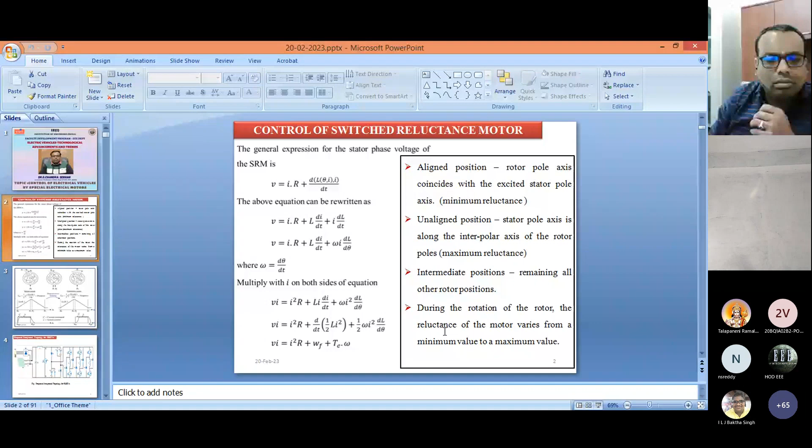Sir, hello, sir. 1 minute, sir. 1 minute. Is it okay, sir, now? Hello? Yes, sir. Now okay, sir. Continue. Okay, it is now control of switched reluctance motor. Thank you, sir. Okay. So, sorry for the interruption, and now coming to my presentation. Thank you.

Then why do we need to go for the switched reluctance motor? As you know, configurations like 6x4, 8x6 or 4x2 are the conventional configurations of rotor as well as stator. I am working on 6x4 or 8x6. Maybe I will clarify why we need to go with 8x6, 6x4 or 4x2, because once we teach that, if any student asks, sir, why do we need to go for only 8x6? Why not 6x4? Or why not 4x2?

If you take the 4x2, it means 4 stator poles and 2 rotor teeth. In a switched reluctance motor, we don't have any winding on the rotor; only the stator has windings, and we switch the excitation of one winding, after that another winding. As the rotor has no winding, it can be suitable to run up to about 10,000 rpm. This is one of the advantages of the switched reluctance motor. The torque by weight ratio is also more, and the volume is also less compared to conventional motors.

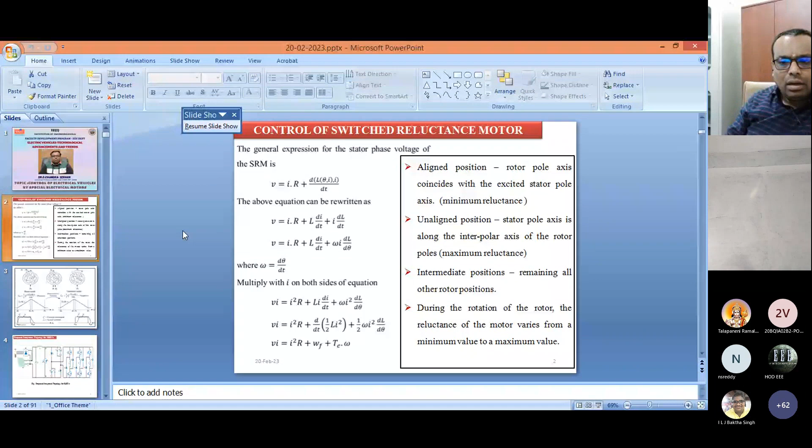Excuse me, sir. Chandrasekhar? Yes, sir. Sir, please change your slide, sir. Only the first slide, control of switched reluctance motor slide, is visible, sir. So now I already changed it, sir. Okay, sir. Thank you, sir. Is it coming now? Yes, sir. Sorry for the interruption, sir. Is it now visible or not? Please let me know. It is visible, sir. So what is visible? Tell me. This is the circuit.

Proposed integrated topology for PHEVs. Plug-in hybrid electric vehicles. Yes, plug-in hybrid. Now, if it is visible, I move to the next slide.

Hello? Okay, sir. Power flow chart in 2 modes. No, sir. Only the previous one, sir. Proposed integrated topology for PHEV. Now? Another screen, sir. Power flow chart, sir. Don't know why. Now the screen is moving, sir. Slides are moving. Excuse me, sir. Make it in slide mode, sir, so that it will be visible. When I make it slide mode, it is not moving. Slides are not moving. Okay. Is it visible now?

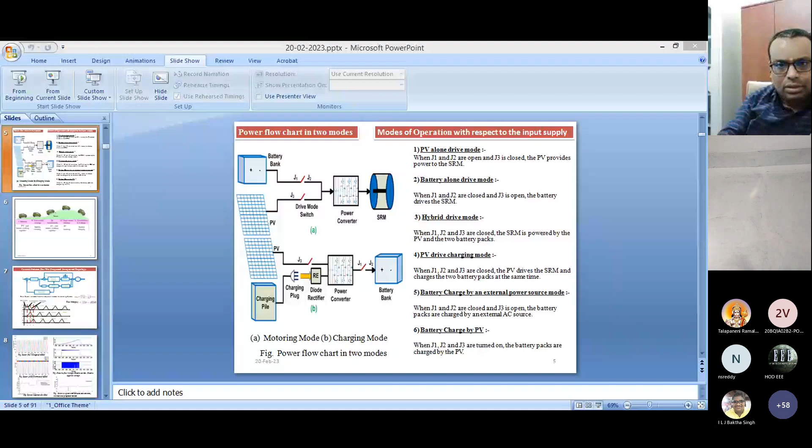Yes. What I propose here in this particular diagram is this proposed integrated topology for the plug-in hybrid electric vehicle. So this is the asymmetrical converter topology, and this is the front-end converter I have developed here. In this front-end converter, there are three relays.

The first relay is J1, the second relay is J2, and these J1 and J2 are the batteries, battery 1 and battery 2, and J3 is the PV panel here. Okay, and if you come to this diagram, here J1, J2, J3. For your understanding purpose, I mentioned here J1, J2, J3.

In the PV alone driving mode, what I am doing is J1 and J2 are open, and only J3 is connected. It means J1 and J2 are open in the sense these batteries are not connected, only J3 is closed. So when J3 is closed, this PV is connected to the circuit now.

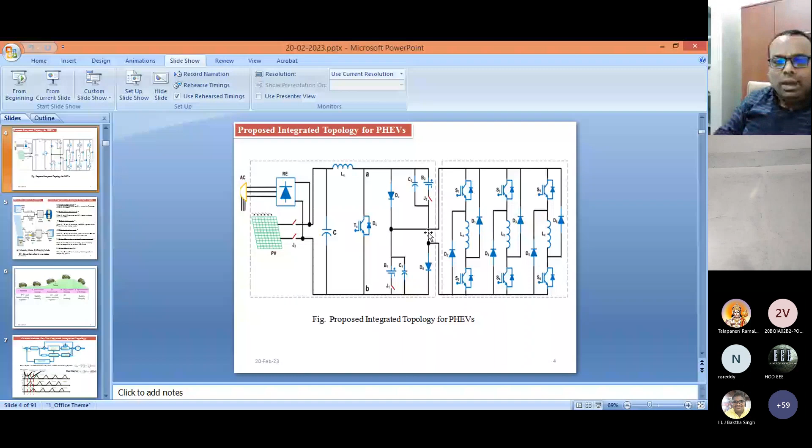Okay, I think my slides are visible now. Is it okay? Yes, sir. Hello? Visible, sir. Are you getting my slides? I think it is moving, right? Yes, sir. Visible, sir. Please, thank you.

Okay, so J1 and J2 are in open position, in the sense the batteries are not connected, and only the PV is connected to the converter, and then the drive is possible. That is PV alone driving mode. Battery alone driving mode in the sense J1 and J2 are connected, and the PV is not connected. Hybrid mode in the sense all three, the batteries as well as the PV, are connected. And PV driven charging mode.

So when J1, J2 are closed and PV drives the SRM motor. And also battery charging by external power source. So this external source is the charging point, when you have the charging plug and you need to charge it. So when J1, J2 are closed and J3 is open, the battery packs are charged through an external source.

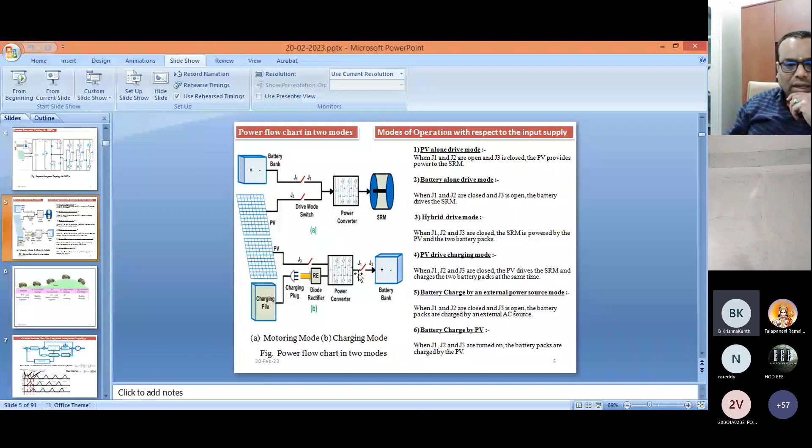Sir, your mic is muted, sir. Hello, sir. Chandrasekhar, sir. Please unmute your mic, sir. Sir, I already unmuted, sir. Okay, sir. Is it visible? Audible? Yes, sir. Audible, sir. Please continue, sir. Okay.

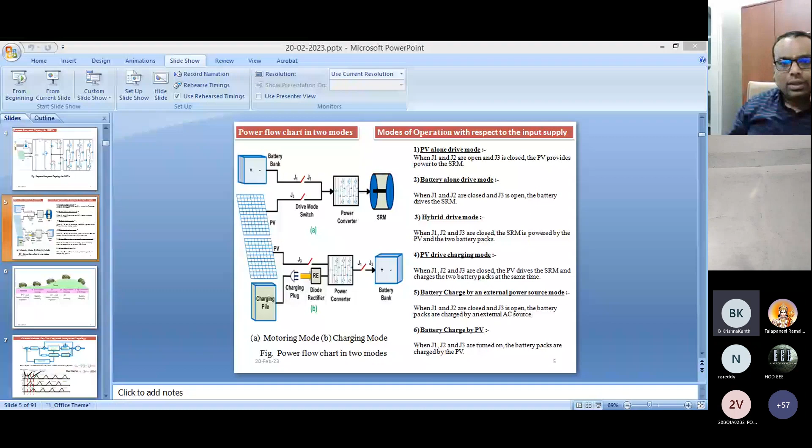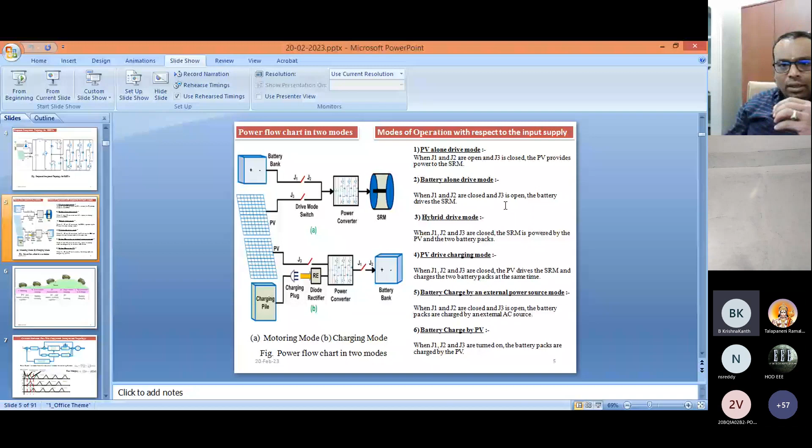So in the starting condition, both PV as well as battery work together because it requires high starting. So in the hybrid mode, with both PV and battery, high starting is possible. At low running speed of operation, only the battery is working. So then it will go with the battery alone driving mode, the second mode.

And in acceleration, when there is some slope, if you are going to a hill station, you need some acceleration. So there PV and battery work together, same as the starting condition. Then when the vehicle is started and going at a certain speed, I have given some speed limitations also.

When I'm doing the simulation in the controller, I have given 0 speed in the starting condition. In the low speed condition, it goes up to 60 kilometers per hour. And in acceleration, even if it is 10 kilometers per hour, it is the acceleration mode, and both PV and battery work together. In the high speed running condition, above 60 to 100 kilometers, I consider as the high speed range.

Because it is not only one speed. I will go with only 60 kilometers per hour, somebody will go 80 kilometers, somebody will go up to 100 kilometers. So I classify the high speed region as 60 to 100 kilometers. During this particular mode, only PV is working.

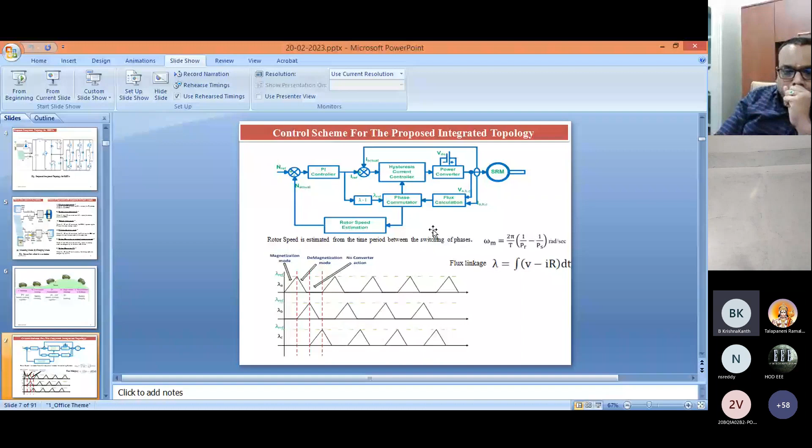I proposed this: the speed of the motor is equal to 2 pi by T, that is the switching time, times 1 by PR minus 1 by PS. PR is the number of poles in the rotor, in the sense number of teeth, and PS is the number of poles in the stator. I hope my slides are moving now.

And in the sensorless control, this is the sensorless control scheme I proposed, by stator flux linkages. For example, I don't know where the initial position of the rotor is. I just excited phase A. When phase A is excited, if the rotor teeth is already aligned with the stator, then there will be no movement, because it is already aligned, even though I started giving phase A.

There are two conditions here. There is no movement on the rotor. For example, you are giving excitation to stator A. Stator A is already aligned, the rotor teeth is also aligned, so there is no movement in the rotor. In that case, you need to start the next phase of the stator for excitation. If you start the next phase, the rotor will slowly align to the next phase. When it is aligned, the flux linkages reach.

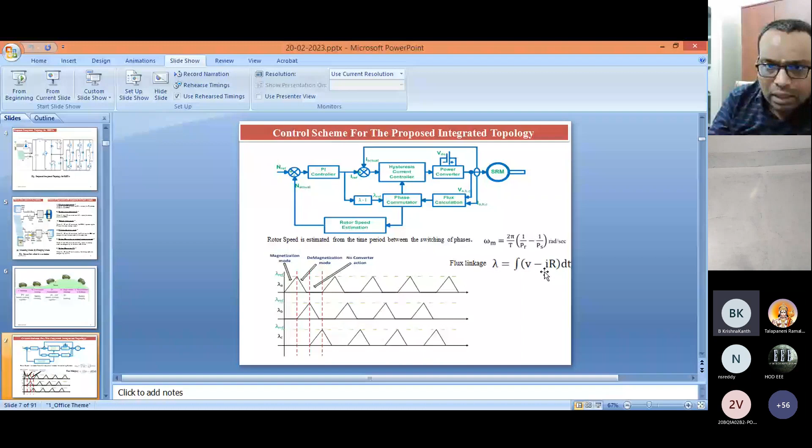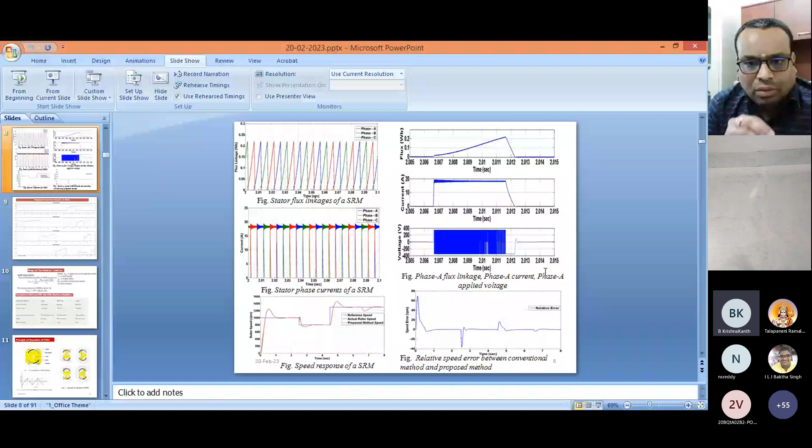And these are the initial observations I observed in the MATLAB simulation: stator flux linkage of the SRM motor, stator currents of the SRM motor, and speed error. I compared the conventional, with sensor, against the sensorless control. So this is the proposed sensorless control scheme. Here you see the phase A, phase B, phase C, and phase D flux linkages.

This is phase D, and the maximum flux linkage is 0.42. The reference flux linkage value is 0.42. Once 0.42 is reached, then, because it is 6 by 4, I am considering phase A, phase B, phase C, phase D: the rotor has 4 teeth and the stator has 6 poles, 6 stator windings. So phase A again starts excitation, and once the phase A flux linkages reach the reference flux linkages.

Reference flux linkage is 0.42. Next one is phase B will start. So again in the phase B, again next phase C will start here. And then next phase D. So this is the sensorless control scheme we proposed.

And then we already dumped this program to the SRM motor and our controller also. So first part, I explained how I am doing the motoring mode as well as charging mode. And second part is how I am controlling the SRM motor through sensorless control. Okay, this is what I have done.

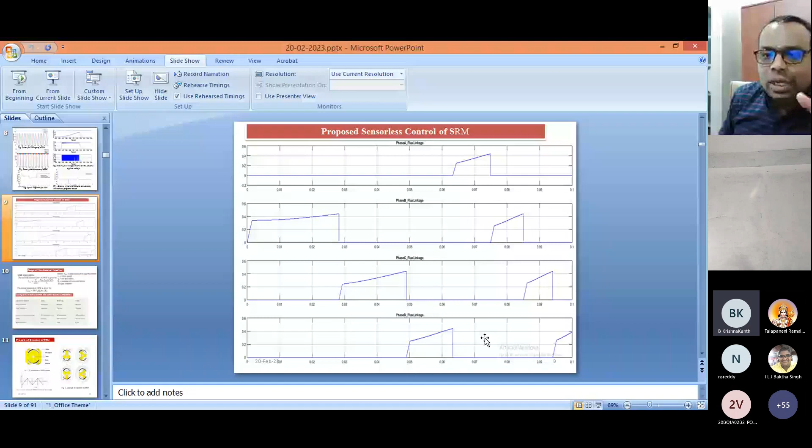So with this, Tesla has also now made a flux reversal machine. Tesla has not named it as a flux reversal motor. They consider it as a permanent magnet internal synchronous reluctance motor. They have made some modification in the motor configuration of this flux reversal motor, and then they use it as an internal synchronous reluctance motor in Tesla.

But now, for our understanding purpose, I am explaining the flux reversal motor. This is also one of the motors which is now used for the electric vehicle propulsion system. This is very simple construction. The only problem in this one is construction, but the working principle is very simple. As we know Faraday's laws of electromagnetic induction, it will be very easy.

So this is the EMF equation. So what are the parameters here, I already explained. And this is the torque equation of FRM motor. I have used the comparison of different motors which are used for the electric vehicle: the switched reluctance motor, the BLDC motor, and flux reversal motor. With the flux variation, MMF variation, the energy conversion loop, and rotor inertia I have considered here. So these are the different comparisons.

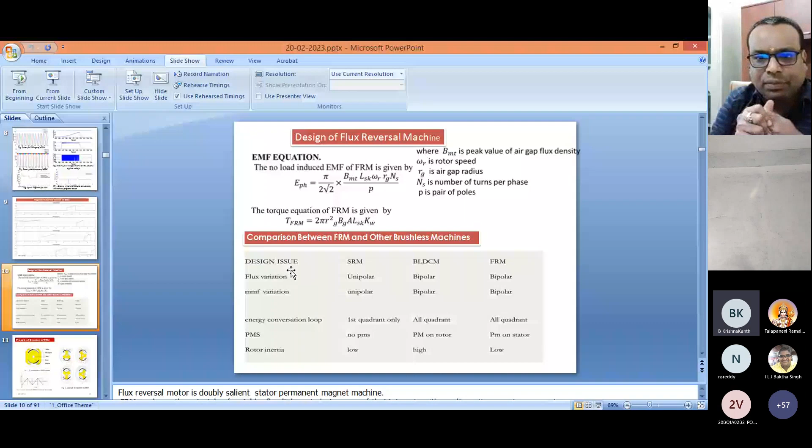And if you see the principle of operation of FRM motor, so in the permanent magnets, see this. I hope my slides are visible, right? Hello? Yes, yes, sir.

I am requesting the audience, if you have any doubts in between, you can please interrupt me, because it is not a one-way communication. I prefer two-way. At any time, if you have any doubts, please interrupt, and then we will go for the discussion. I am not waiting for the end of my presentation. If I am teaching, whether you are following or not, I don't know, especially in online mode. So if you have any doubts, please immediately disturb me. Then I will clarify it.

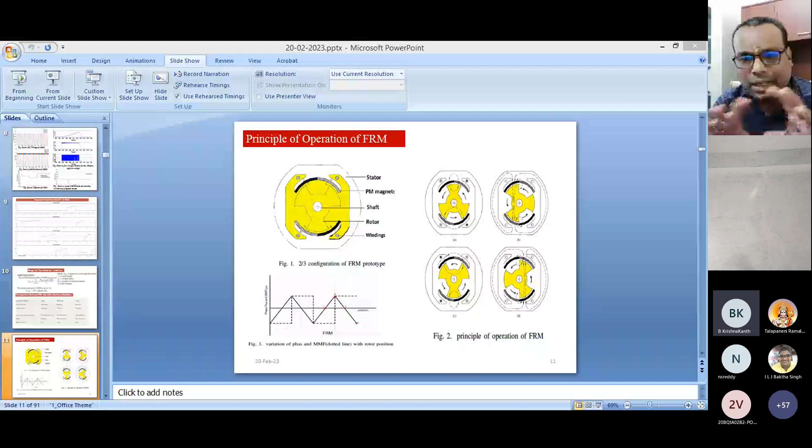Okay, this is the basic 2x3 configuration of flux reversal motor. As I already addressed

One participant is asking, sir, why you need to consider only 6x4, or only 8x6 in a SRM motor? Why not 4x2? If you consider 4x2, the step angle is the important thing. The step angle will be 90 degrees for 4x2.

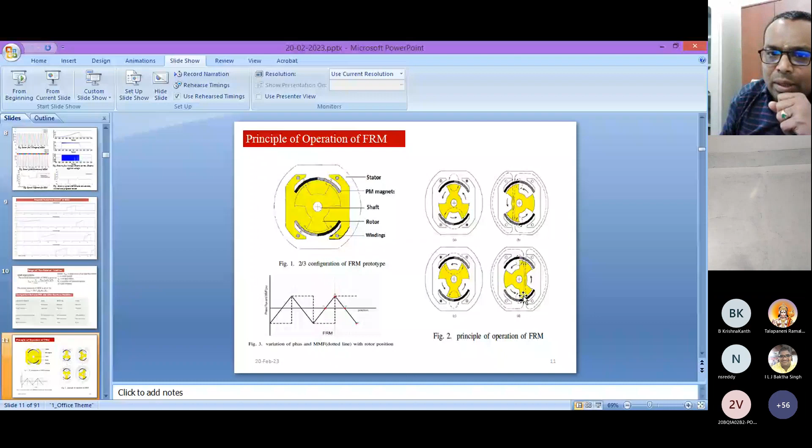This configuration, Tesla has already started using, and now Tesla motors are running with this. They don't name it a flux reversal motor — they name it an internal permanent magnetic synchronous reluctance motor, a different terminology. These internal permanent magnets are placed in the pole shoe, and in this arrangement, ambient temperature heating is also not a problem.

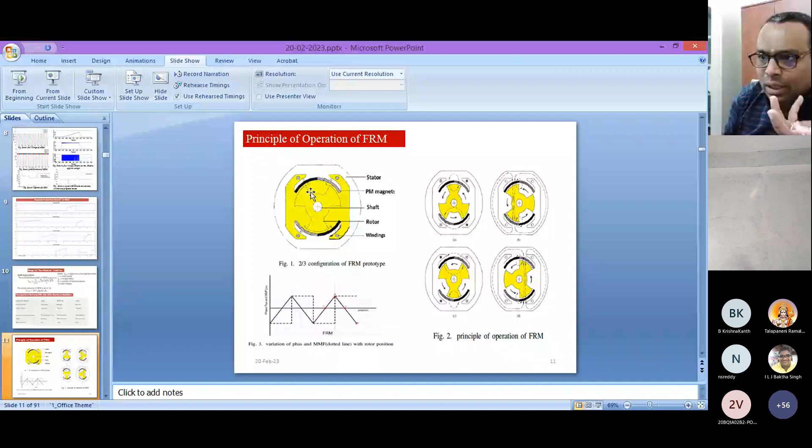This is why you go with the FRM motor. Why not SRM motor? Why not BLDC motor? Why not these doubly salient synchronous motors? In the SRM motor, switched reluctance motor, the magnetomotive force and phase flux is unidirectional.

In the doubly salient permanent magnetic motor, it is also unidirectional, but the negative flux is not possible here. In the BLDC motor, it is possible — it's a trapezoidal operation, also possible, but when it comes to the FRM motor, you can see the change from positive to negative is possible, compared to the BLDC motor. So this is the comparison between the FRM motor, the doubly salient permanent magnetic machine, and the brushless DC motor, using the magnetic flux MMF diagrams.

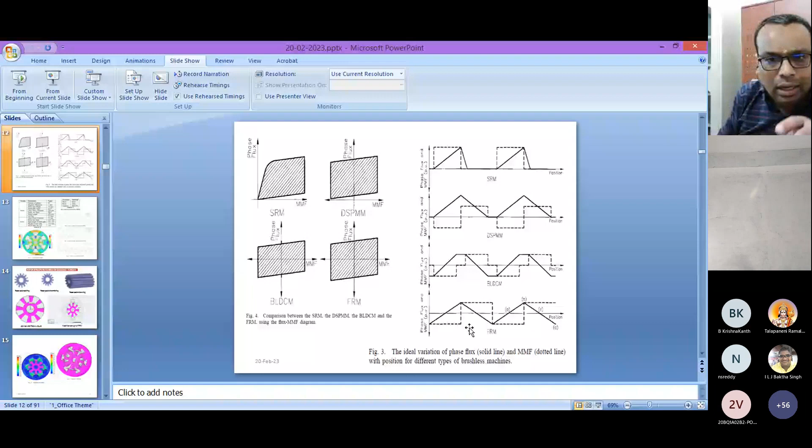I have already done this FRM motor in ANSYS. I am using the ANSYS software, Maxwell, on the ANSYS platform. I have developed this like 6 by 8, 6 stator and 8 teeth here.

So these are my parameters which I consider for stator as well as rotor. And also here I consider the magnets are samarium cobalt 24 magnets.

If I talk about permanent magnets again, it may take half an hour discussion. So why did I consider only samarium cobalt? There are Alnico, Alcomax, samarium cobalt, neodymium. Neodymium is one of the best permanent magnets. The Curie point temperature is also good really.

This samarium cobalt will also give us a very good Curie point temperature, and maximum flux linkage is also possible. I considered this first, before going to the hardware setup, I did this analysis in the ANSYS software. So this is my presentation, sir, is it visible?

Hello? Yes sir, yes sir, visible sir. Conventional 6 by 8 FRM motor is visible now. Hello? Sir, hello, is it visible sir? No sir, change the slide sir.

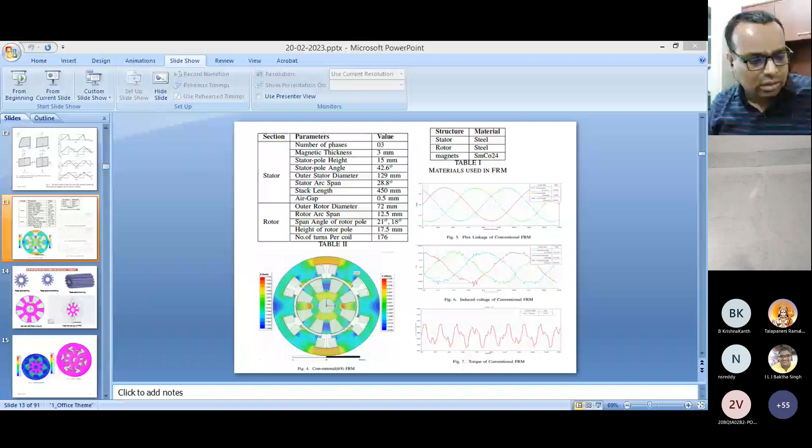Okay, Table 1, materials used in FRM is visible, sir. Yes sir, conventional FRM is visible, sir. Okay, continue, okay sir.

Continue, sir, okay. So the flux linkages of the conventional FRM motor and the induced voltages of the conventional FRM motor, and here this is the cogging torque.

This is one of the major factors when you go with special electric motors. This cogging torque is one of the problems. So how to minimize this cogging? How to neutralize this cogging? It's not possible to neutralize, but we need to minimize it.

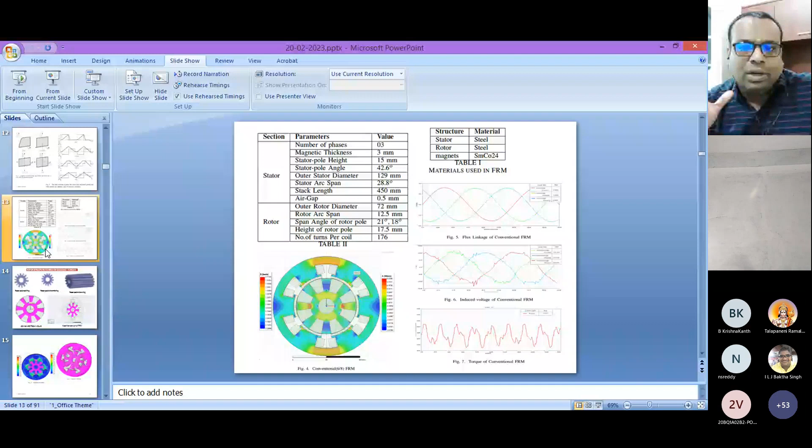So for this case, what I have done is I consider different rotor structures to reduce the cogging. From the literature, there are three types of rotors possible: one is rotor pole pairing, another is rotor pole chamfering, and another is rotor pole skewing. These are the three rotor configurations available for the FRM motor, flux reversal motor.

So in pole pairing, if you observe here in rotor pole pairing, the rotor pole width, one pole has different pole widths which I consider here, in rotor pole pairing and rotor pole chamfering.

This is also another technique. So why I am using these techniques is to minimize the cogging torque. Cogging, sometimes we call it ripple torque or cogging torque. So again here, rotor skewing technology, skewing.

So the combined technique. This is the earlier conventional 6x8 FRM motor, and now what I have done is first I tested with these two techniques, rotor pole pairing and rotor pole chamfering. Then what is the cogging torque?

And again I tested in simulation rotor pole chamfering and rotor skewing, rotor pole skewing. Then again, what is the cogging torque? Then what I have done is after combining all these techniques, I am getting less cogging torque.

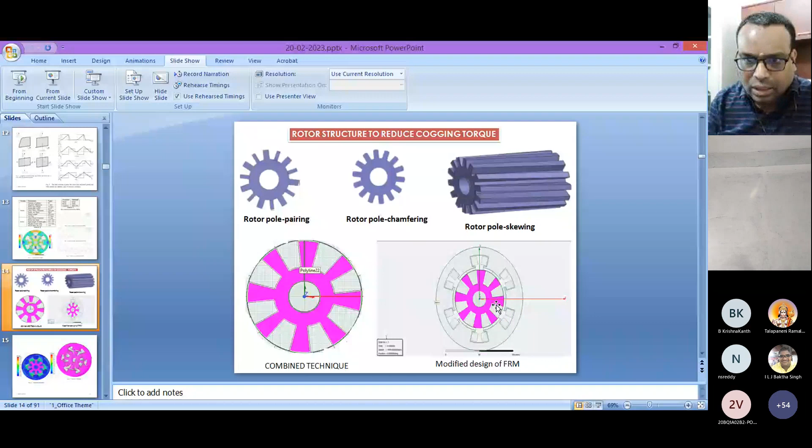And that is the combined technique, this is the combined technique. With this combined technique, I again designed the FRM motor, and these are the flux linkages. This is the rotor pole skewing technique when I did it in the ANSYS software.

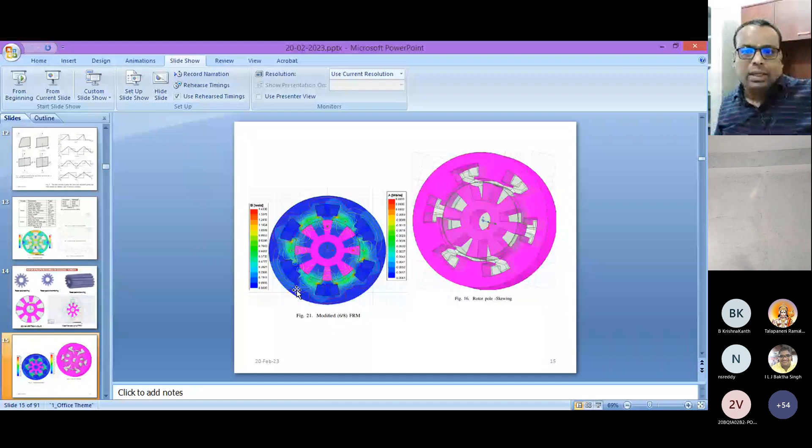So these are the ANSYS waveform images, and this is the modified flux reversal motor. The flux density, see here, the flux density areas and the variation of the fluxes I also consider here. You can see here for this particular modified technique.

So I have seen, you can see here in my comparison table also, different parameters I have considered: flux linkages, induced voltage, torque, and cogging torque. Cogging torque peak to peak I consider here.

For rotor pole pairing, the flux linkage will be 0.4352 webers. And for rotor pole skewing, 0.269. And the conventional is 0.4072.

And the modified, in the sense I introduced all rotor pole pairing, rotor chamfering, and rotor skewing, so then in the modified method or modified model, I got these flux linkages, a less flux linkage compared to the conventional, I got a less value, but the cogging torque is reduced here, 0.7052. This is reduced here. And the torque, the amount of average torque, is 18.527 Newton meters I'm getting. The major thing is, this is the major problem.

The cogging torque we need to reduce. So in the modified method, I got less cogging torque here. This is one method which is also used for electric vehicle movement, propulsion of electric vehicles.

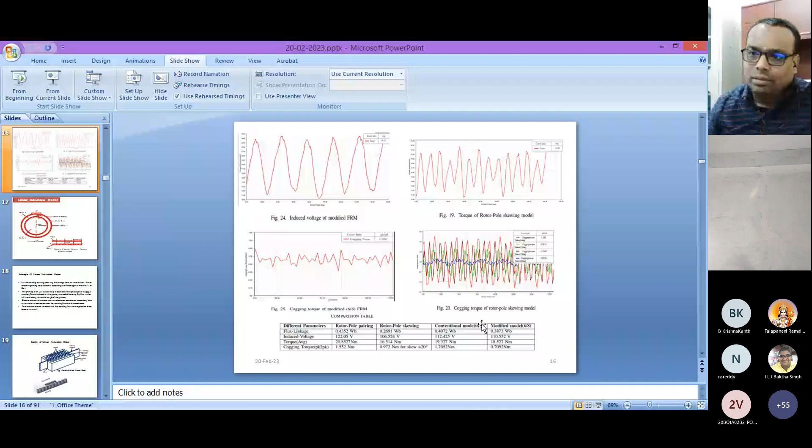And coming to another one, so now people are already aware and working on this linear induction motor. Sir, how much time do I have?

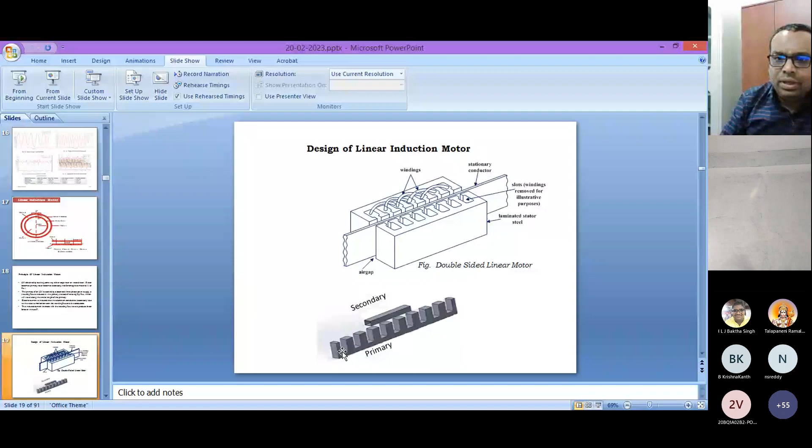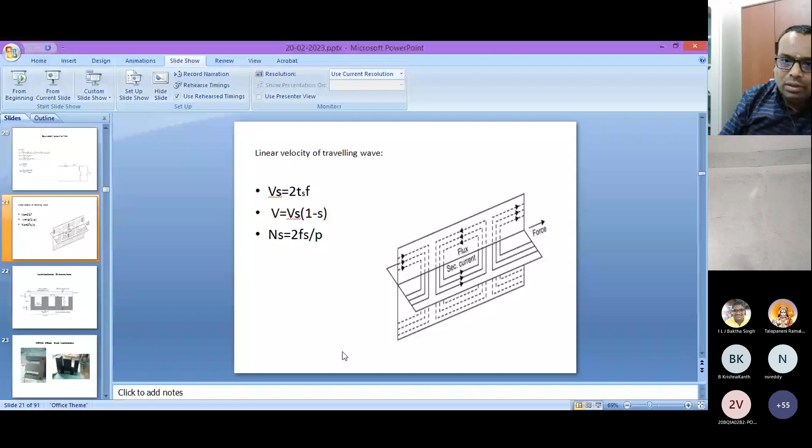You may have one doubt, sir, when you are cutting the induction motor in a linear fashion, then what about the traveling flux? Definitely the end effect and edge effect will also exist. So how to neutralize this end effect and edge effect, that is also another set of research.

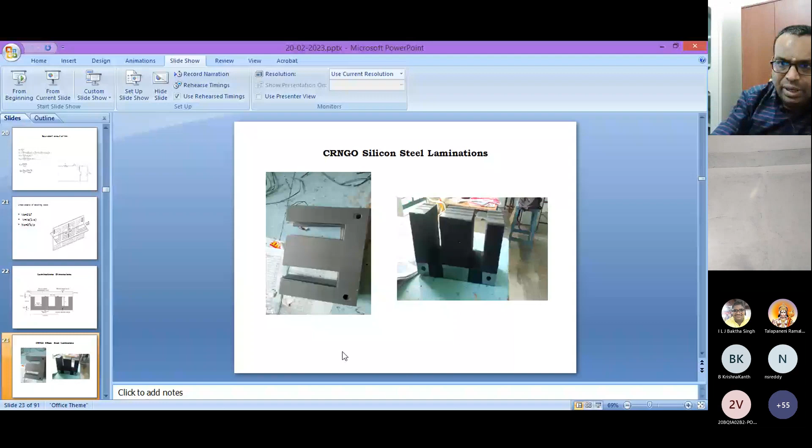I think this is the laminated core, and this is my winding arrangement. After this I have done the winding arrangement. The number of slots I considered is 12, and number of poles is 2. Number of phases is 3 phase, slots per pole per phase is 1, pole pitch is 6, and slot angle is 30 degrees.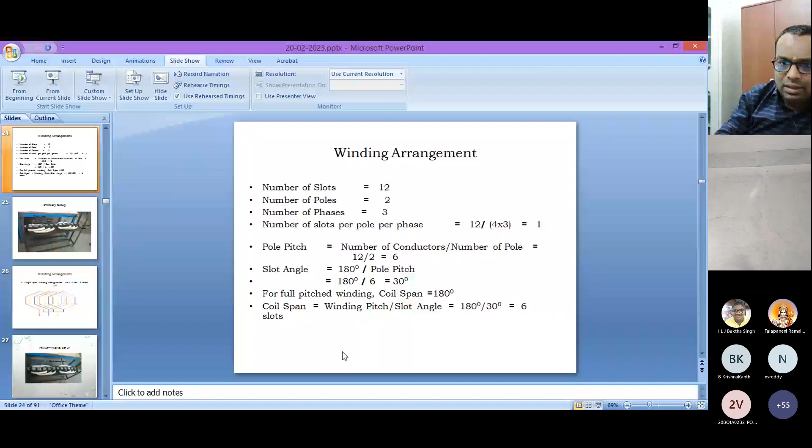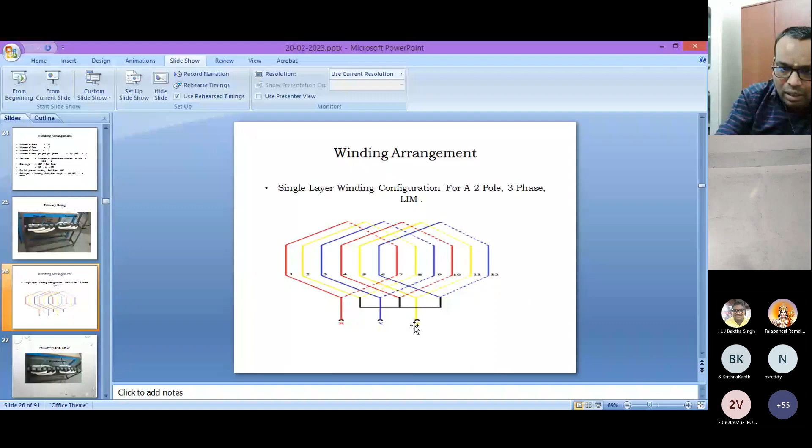Full pitch winding: the coil span is 180 degrees, and this coil span is 6 slots I am considering. And this is the winding arrangement for single layer winding configuration: R phase, Y phase, and B phase. Based on this winding arrangement, I have done this winding diagram, and after putting it together, this is my complete setup.

This is the primary setup. This is my stator. See here these three coils, coil A, coil B, and coil C, and again coil A, coil B, coil C, because it is a two pole. This is one pole and this is another pole, a two pole machine, because I considered here the number of poles is 2 and the number of slots is 12.

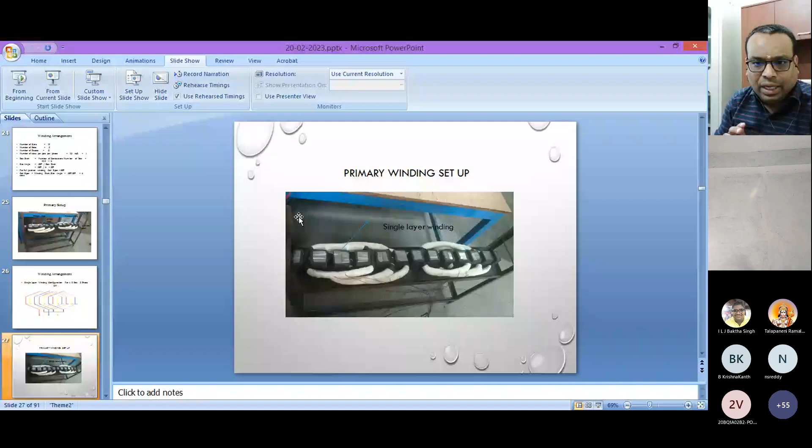So I developed this linear induction motor in the lab. This is the mild steel table, the primary winding and primary slots, and this is the primary setup I have done. This is the winding diagram, and the primary winding setup is the single layer winding. And for the secondary, what I have considered is the aluminum bar, and I have attached some wheels on the aluminum. This is the design of the secondary rail.

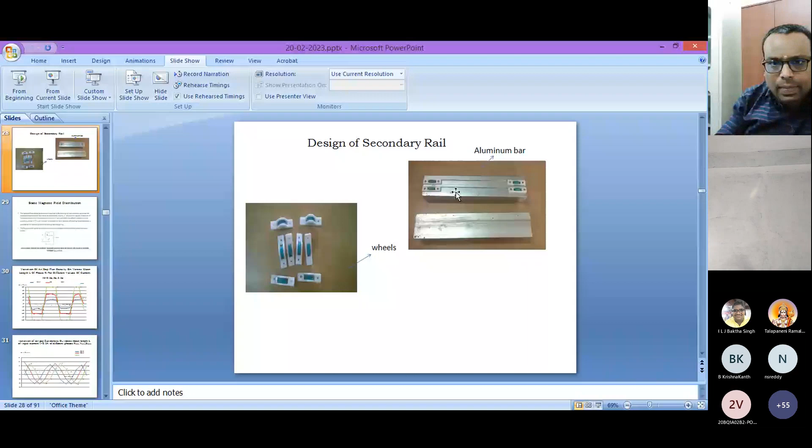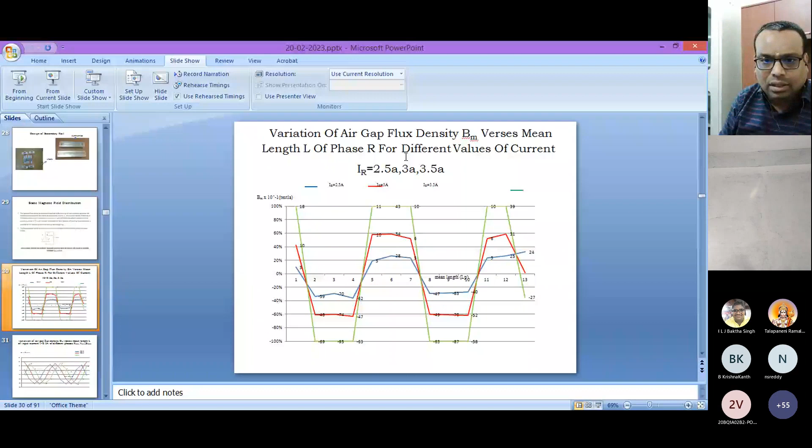After drawing these values, I'm getting the three-phase waveforms when it is 3 amperes and when it is 3.5 amperes. See here, 2.5 is the blue line, 3 is the red line, and these are for each excitation. So I'm getting sinusoidal three-phase voltages here.

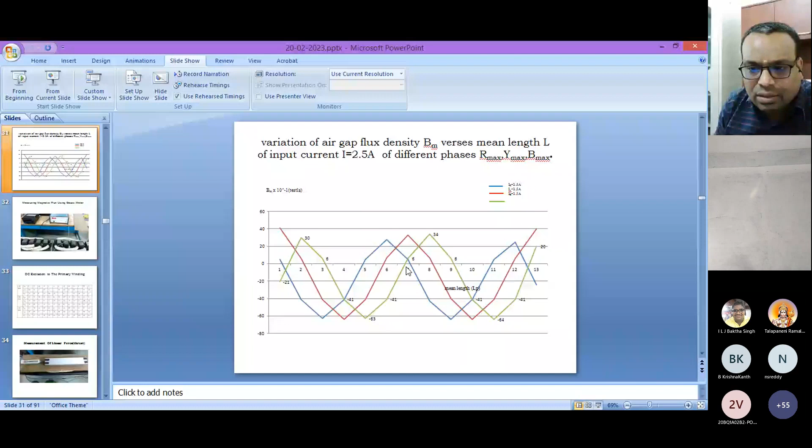And also how to find the measurement of linear force, that is thrust. Linear force is nothing but thrust. When you excite the primary winding, the primary and secondary are insulated; the wood is the insulating material. When you excite the primary winding, a traveling magnetic field or traveling flux is created, and because of the traveling flux, the secondary rail is moving. I considered the variation of the secondary velocity with respect to input current, and the thrust versus speed characteristics.

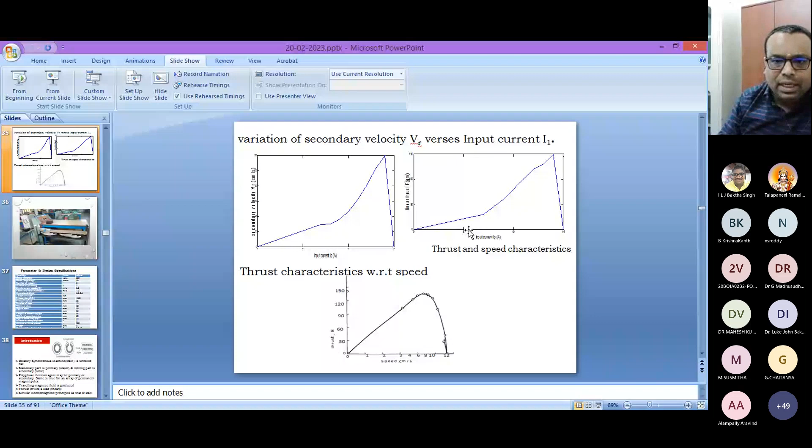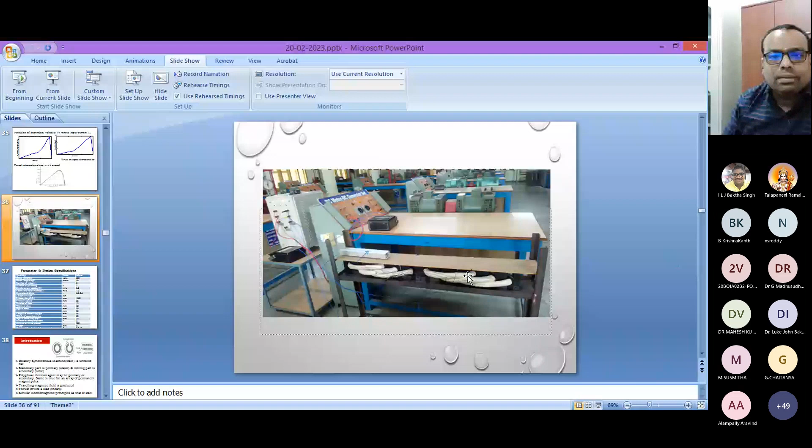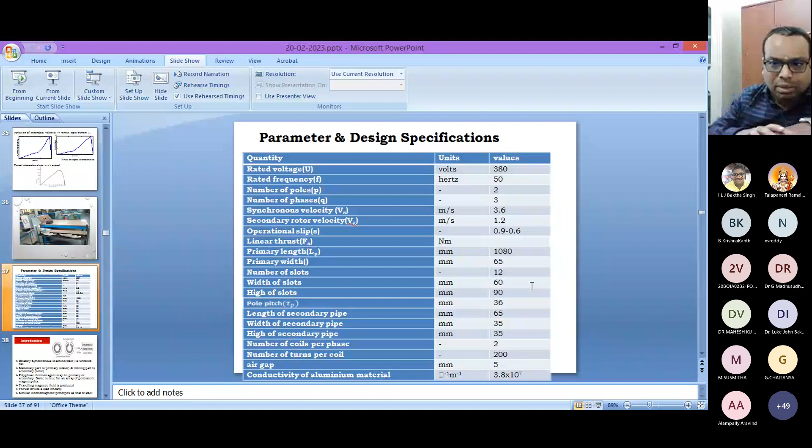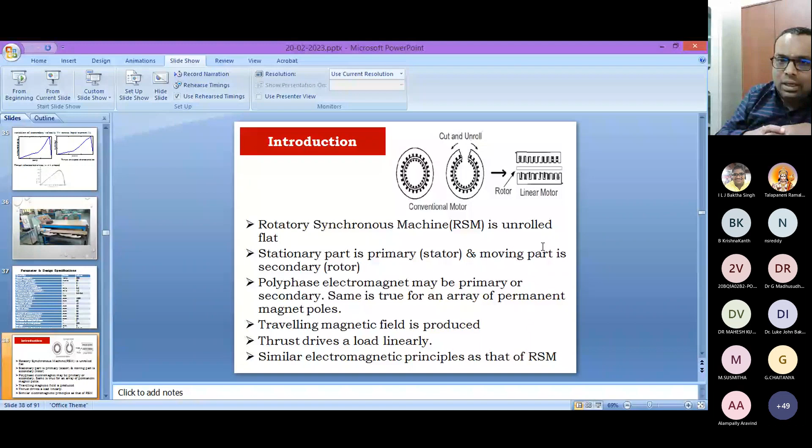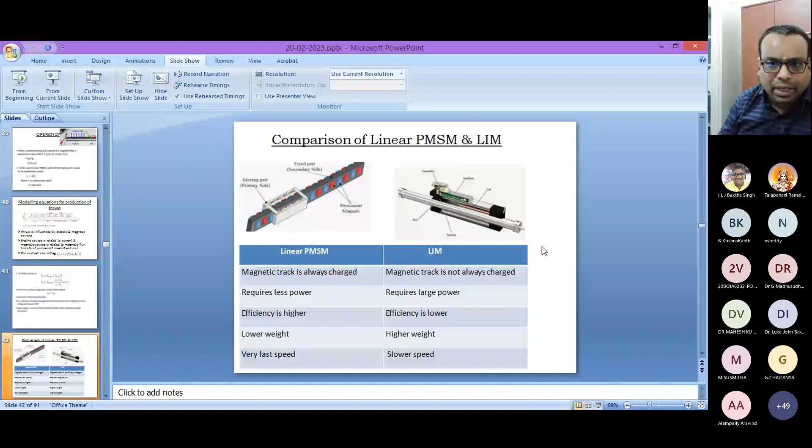And the main problems I identified: the thrust ripple generated due to various reasons, like the primary flux linkage distribution, reluctance forces and cogging forces. There is a disturbance of the positioning, and linear PMSM losses I also considered.

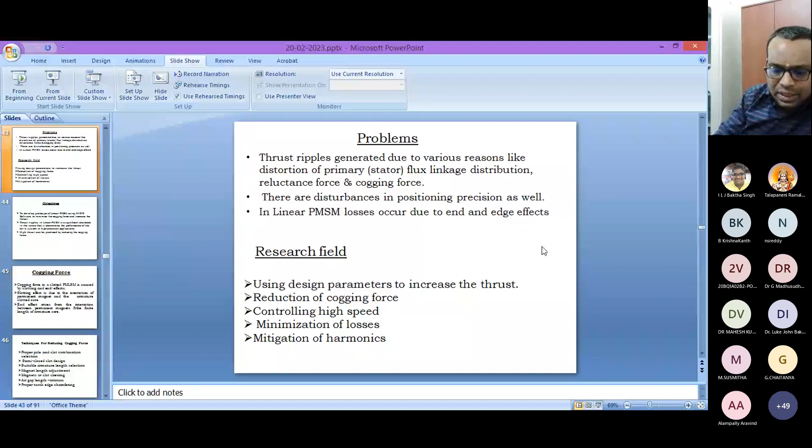And the main research fields I have considered: reduction of the cogging force, controlling with high speed, and minimizing the end effect and edge effect. So the objective is to develop a linear permanent magnet synchronous motor using ANSYS software to minimize the cogging forces and increase the thrust. Thrust ripple of the linear permanent magnet synchronous motor is a significant drawback. And then high thrust we have done.

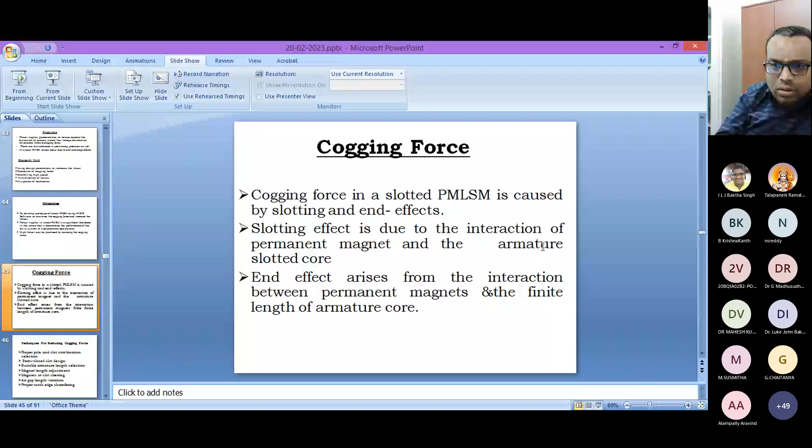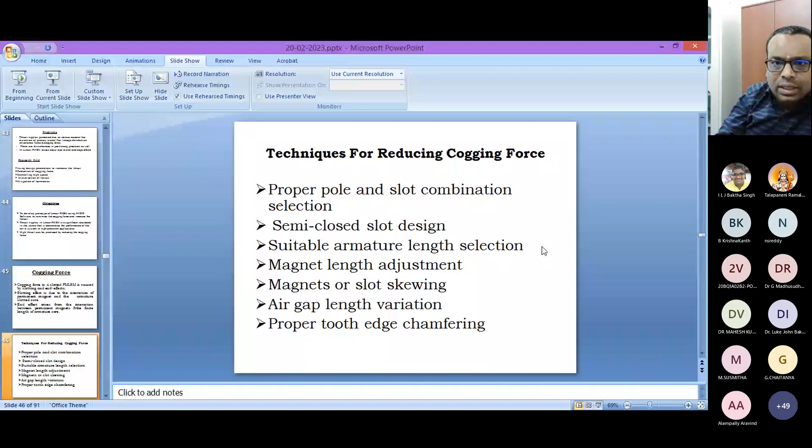So the cogging force, how we need to reduce the cogging force. What is the interaction here? And the techniques for reduction of the cogging force: proper pole and slot combination selection, semi-closed slot design, suitable armature length selection, magnet length adjustment, magnet or slot skewing, air gap length variation, proper teeth edge chamfering. So these I have considered. These are the reduction of cogging forces.

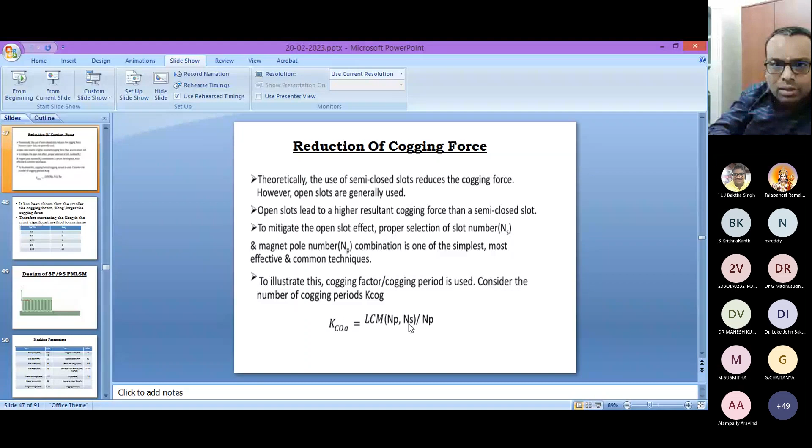LCM of number of poles and number of slots, divided by number of poles. This I considered: the cogging factor K. How we need to consider the cogging factor? The LCM of number of poles and number of slots. And this is what I have done. So after doing this, NP by NS is 4 by 6, 6 by 9, 8 by 12, 8 by 9, and 8 by 15. And this is the cogging factor. Number of poles is 4 and slots is 6, and for this case, the cogging factor is 3.

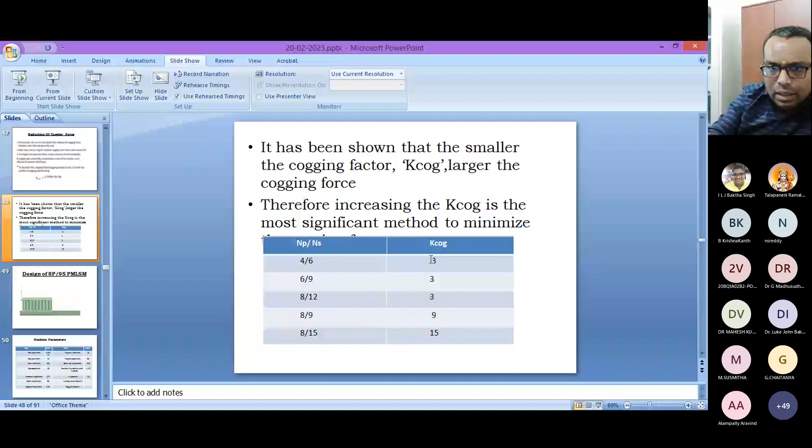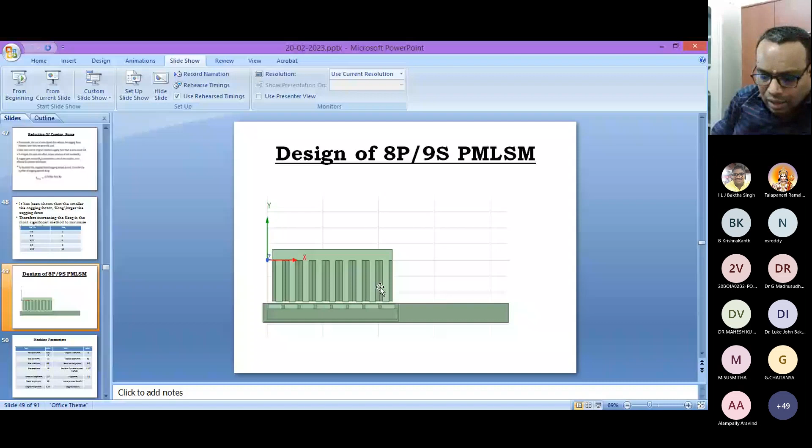The design of the 8 pole and 9 slot linear permanent magnet synchronous motor. So you see here, these are the 8 poles and 9 slots. I consider here the ANSYS software, and these are the machine parameters I consider: the pole pitch, slot winding, slot width and slot depth. When I am doing the ANSYS model, these values I consider.

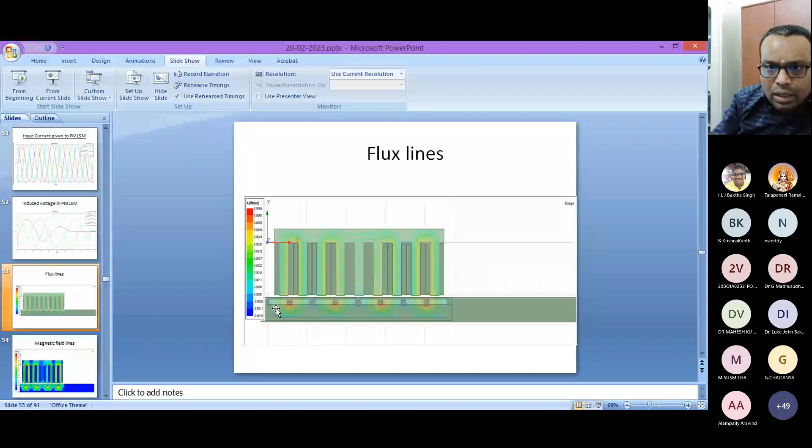And this is the input current given to the linear permanent magnet synchronous motor. And these are the induced voltages. See here, the induced voltages are not clear here. Okay, so this is the flux distribution. See here, the flux distribution of each phase and also each slot. And then magnetic field lines. This is the magnetic field lines in the ANSYS software.

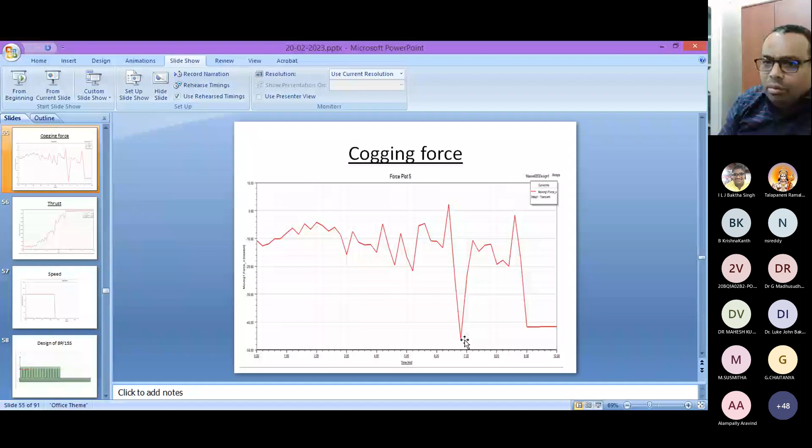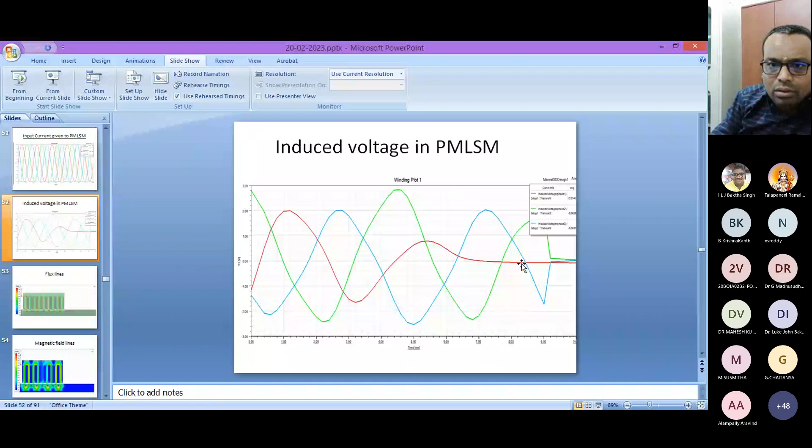We captured this. And this is the cogging force for the 8 by 9 design. This cogging force is coming down here, because see here, up to this it is existing, and suddenly some dip is existing here. So the induced voltage in one phase is coming like this. And now the thrust is also calculated. The thrust value is increasing linearly.

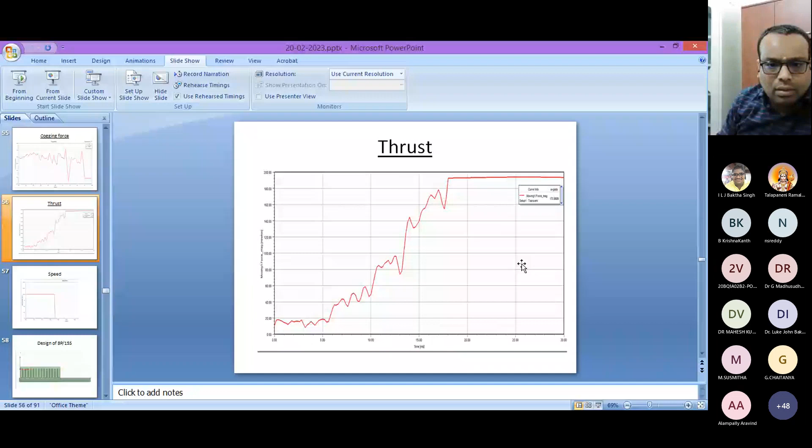Somebody is calling and then it is disconnected. My voice is disconnected now. No, okay.

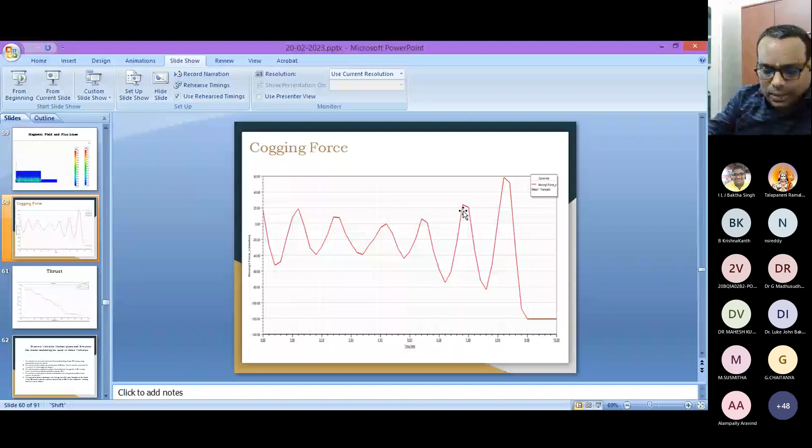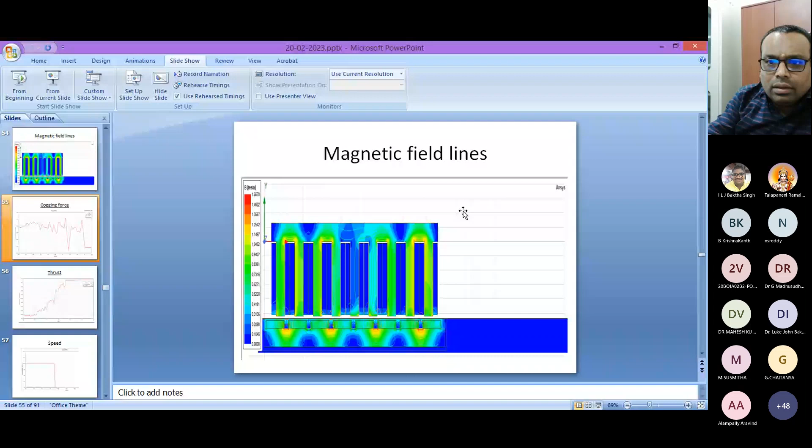And this is the cogging force. You can observe the 8 by 18, yes. Thrust value. And this is about the motors.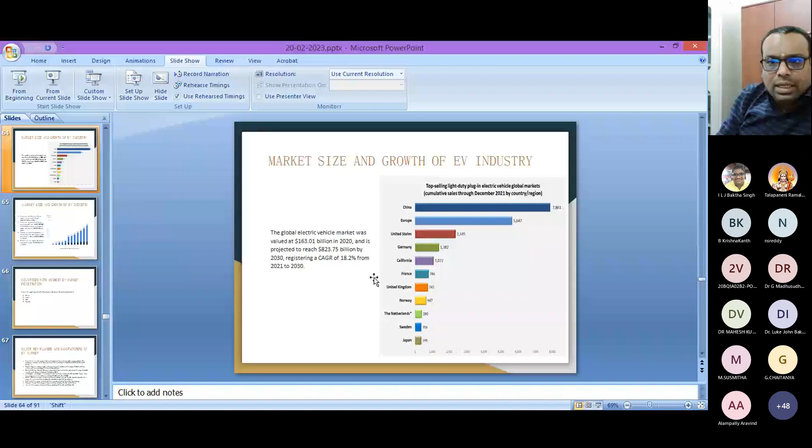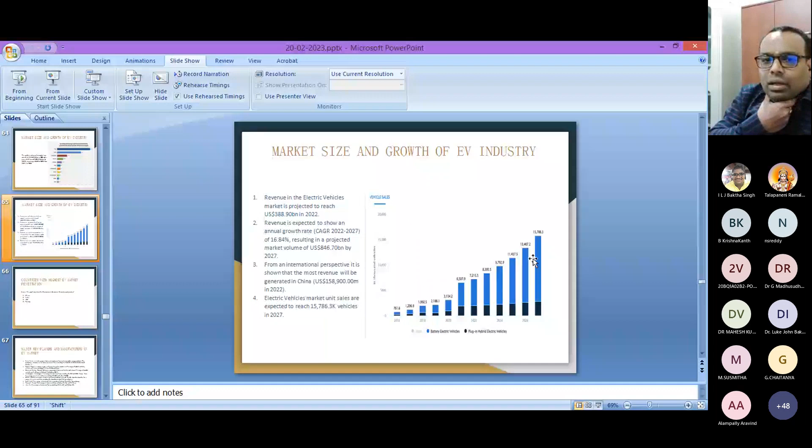And the market size and growth of the EV industry with battery electric vehicles and plug-in hybrid electric vehicles. The plug-in hybrid electric vehicle is now growing. As of now, the battery electric vehicles are moving. And the countries with highest EV market penetration, as per the graph in the previous slides: China, India, USA and Norway, these are the 4 countries using electric vehicles predominantly as of now.

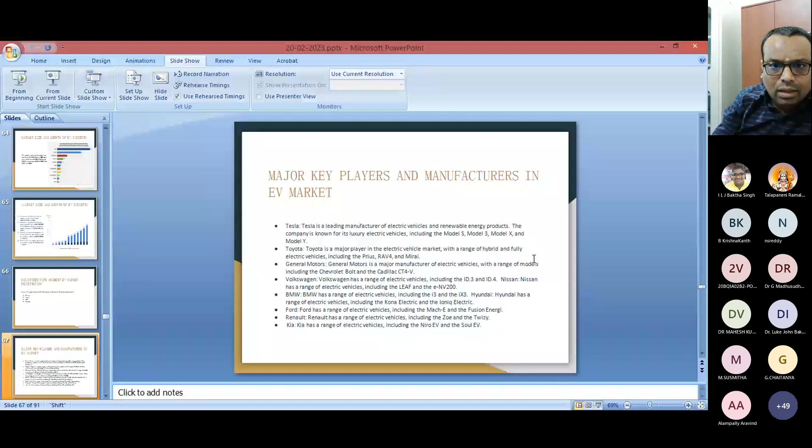The major key players and manufacturers in the EV market are Tesla, Toyota, GM, General Motors, Volkswagen, BMW, Ford, Kia and Renault. So these are the main manufacturers. And the sales trends and consumer attitudes towards EVs: the Indian scenario, China scenario, and United States and Norway scenario.

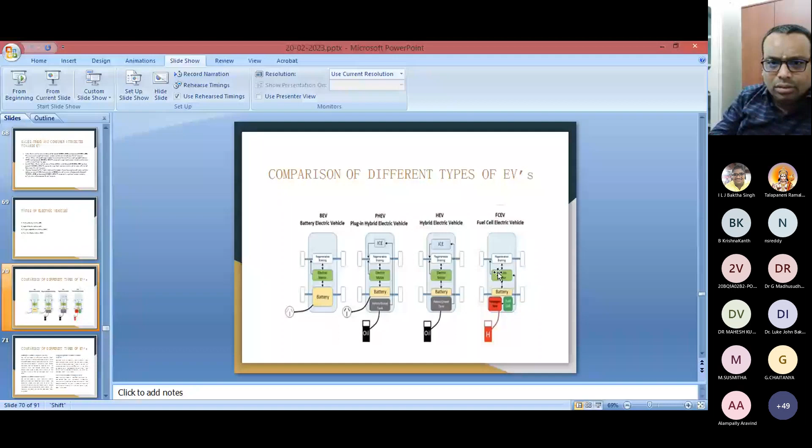And the types of electric vehicles: battery electric vehicle, hybrid electric vehicle, plug-in hybrid electric vehicle, fuel cell electric vehicle. This is the general comparison of different types of EVs. This is battery electric vehicle, the battery case. And now plug-in hybrid electric vehicles, what I discussed in SRM motor. This is plug-in hybrid, and this is hybrid electric vehicle. This is the fuel cell based technique. So the comparison of battery electric vehicles, plug-in hybrid electric vehicles, hybrid electric vehicles and fuel cells.

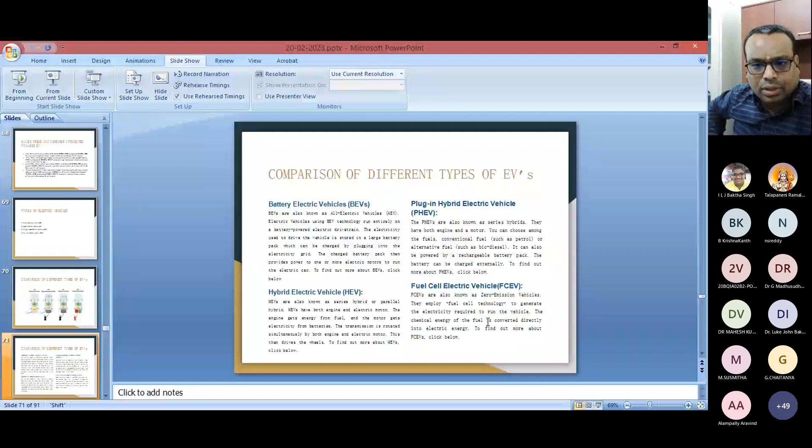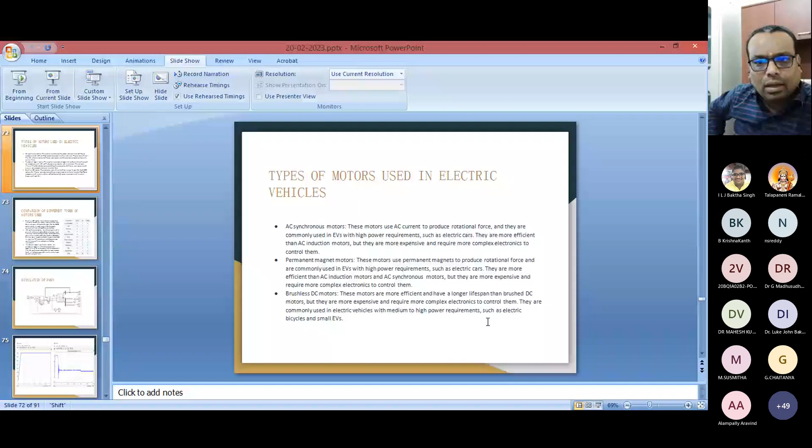The types of motor I already informed you: AC synchronous motor, the induction motor, permanent magnet motor, and the brushless DC motor is also used. These are the 3 motors. Now they are also using interior permanent synchronous reluctance motor and switched reluctance motor. These are the comparisons of different motors like BLDC motor, induction motor, and permanent magnet synchronous motor. In all cases induction motor is best, but the only problem in induction motor is the shoot-through fault. If any shoot-through fault occurs, the entire winding will be damaged. And it is not possible to go with a reduced speed also.

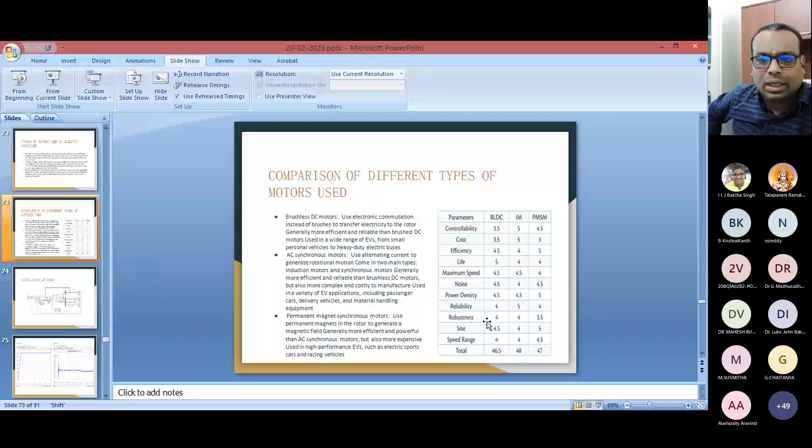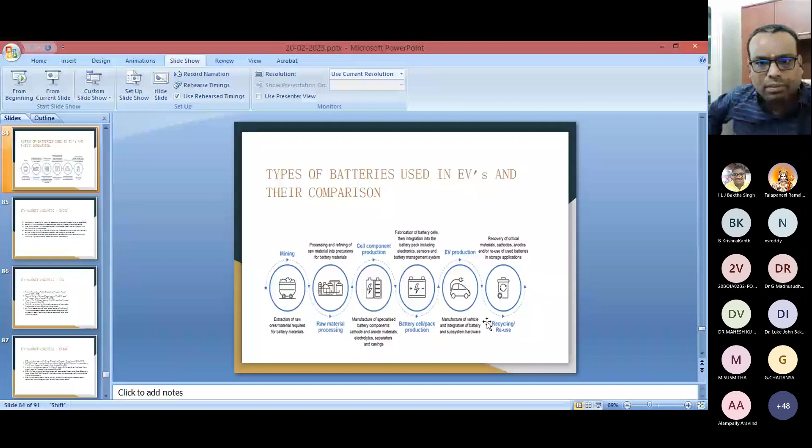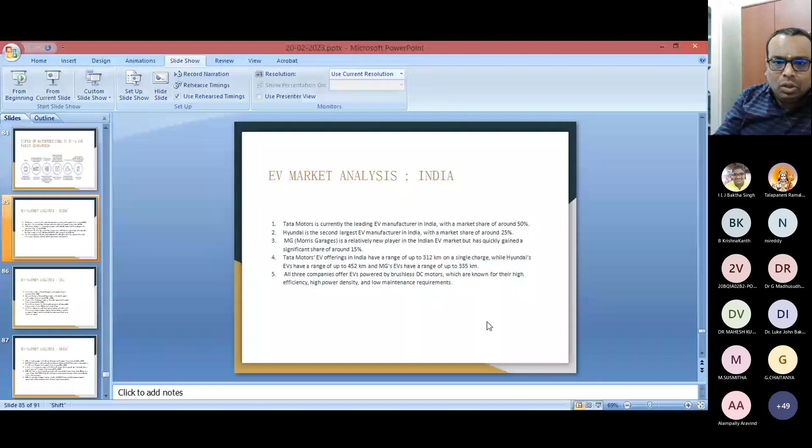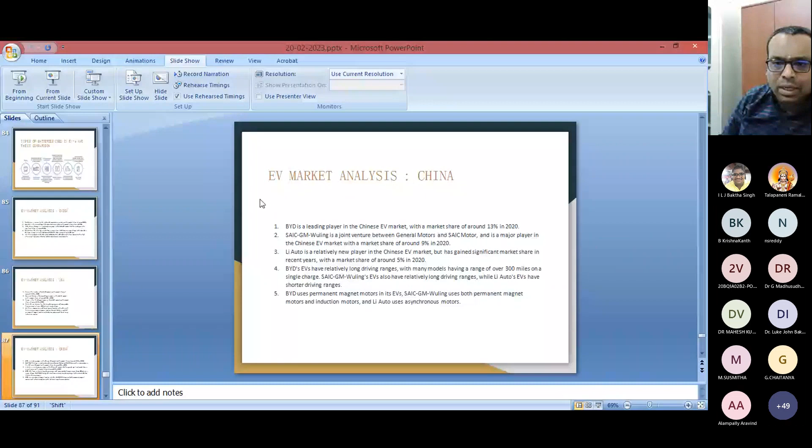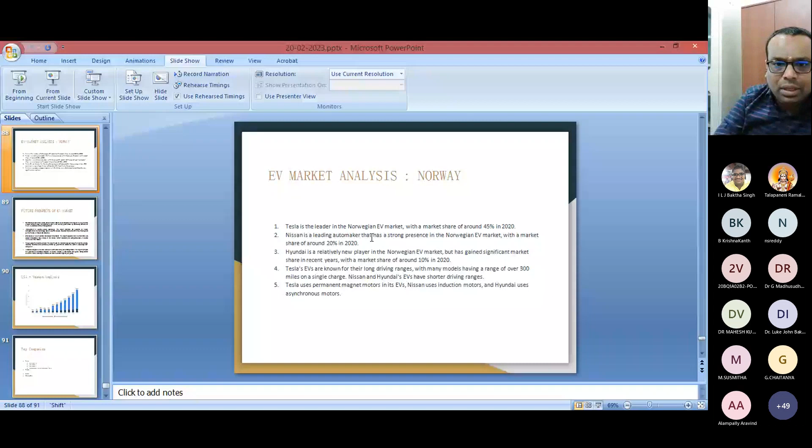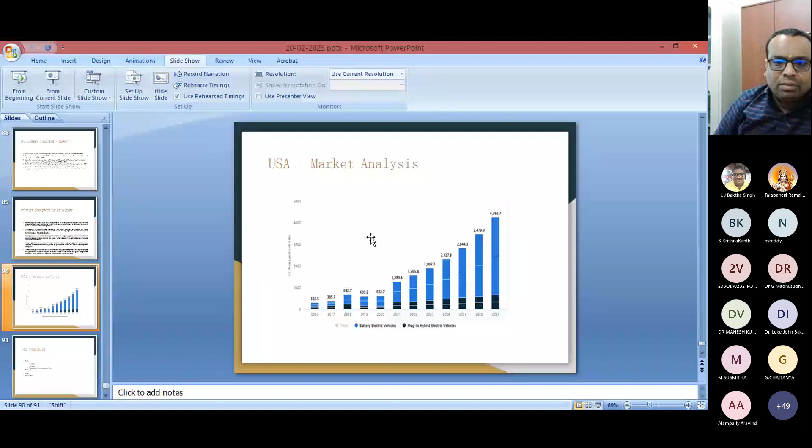This is about USA market analysis, hybrid electric vehicles and battery electric vehicles. Top models in USA are Tesla Model S, Tesla Model 3 and Tesla Model X. So this is about my presentation.